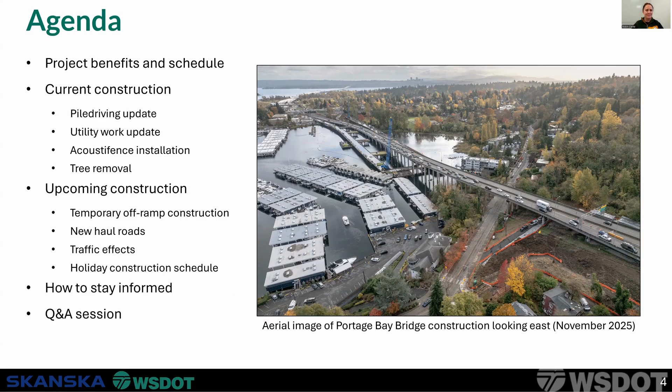All righty, thanks Alan. I can tell when someone's not really from a northern area or not used to the winter because I haven't even broken out my winter jacket yet. It's frigid, but I do hope everyone's staying warm. Thanks everyone again for joining us this month. Looking forward to giving you guys this month's updates and looking forward to the holidays and a happy new year.

So we'll start off as usual with our project benefits and a quick recap of where we're at in the overall project schedule. For folks on the line not familiar with our project, we are replacing the existing SR 520 bridge, eastbound and westbound, with two new Portage Bay bridges, also going eastbound and westbound, as well as some new bike and pedestrian connections that will connect our North Capitol Hill neighborhoods to the Roanoke neighborhoods, as well as the Montlake neighborhoods across the bay. We have the extension crossing as well over the bay through SR 520 on that south side, and we'll have the Roanoke lid on the left-hand side of that graphic, which will bring it all together with those bike and pedestrian connections.

For our schedule updates, we're towards the end of Q4 in 2025, getting towards the end of this year. Can't believe how fast it has flown, but we are in the midst of our new westbound bridge construction, still tracking along pretty well with that. We're going to get into some heavier activities next year that we'll discuss with you in upcoming meetings. We're also getting started with a lot of our Roanoke lid construction activities, which will also ramp up into next year. And we're in the middle of our in-water impact pile driving season 2, although we've taken a pause on our impact pile driving activities in particular, which Ray will talk about here in a moment.

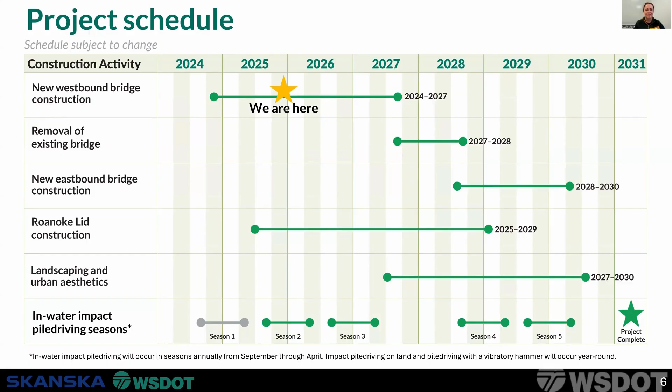And with that, I'll pass it over to Ray to kick us off with some of our current construction activities.

Thanks, Robin. I'll review the current pile driving activities. Like Robin briefly mentioned, we are currently done with pile driving for 2025, so you get a nice break for the holidays. We will resume our season 2 in-water impact pile driving, which will continue early in 2026, and that will continue till April 30th in 2026, which will complete our season 2 in-water impact pile driving.

We will have a small amount of piles over on the off-ramp towards Montlake Boulevard, which is where our temporary off-ramp will be. We'll be driving some piles as early as January 3rd. These will be 10 smaller piles, about a foot in diameter, much smaller than the piles we've been doing, and we'll be vibrating those in with impact on standby if we need to, depending on field conditions.

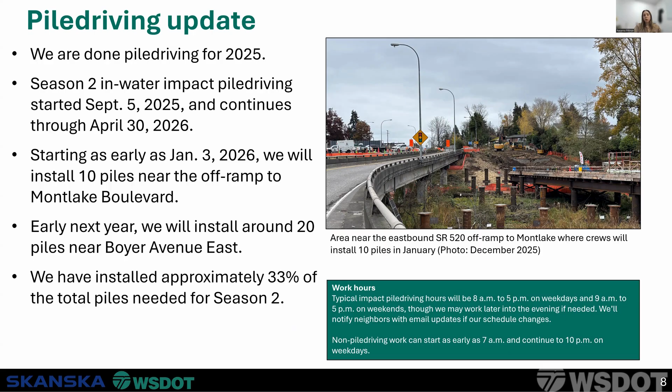Like I mentioned, early next year we'll continue our work trestle impact pile driving with about 20 piles near Boyer Avenue East, roughly between the Portage Bay condominiums and the Queen City Yacht Club, underneath the current existing Portage Bay Bridge, around that area. We have roughly installed about 33% of our total piles for season 2.

As a reminder of the different types of pile driving activities we perform, we have vibratory and impact pile driving, and we're currently in the in-water impact pile driving season.

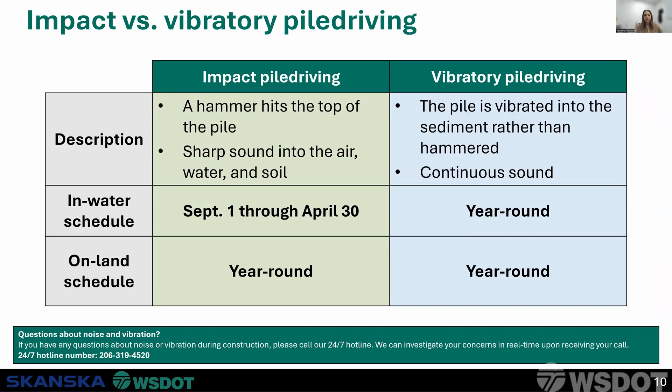And with that, I'm going to pass it back to Robin. Alright, thanks Ray. So I'll talk a little bit into some of our other ongoing construction activities here, starting off with some of our utility work.

What we've been working on recently is a King County Metro utility relocation. If folks have been driving near the East Roanoke Street area, you may have seen crews working in and around the park or the fire station there, primarily between Harvard and 10th. We've had some traffic control and operations going in during the day and sometimes during the night.

We've completed most of our work over there for the time being and for the rest of this year, but we'll have a little bit more utility work to get into next year. For the King County Metro utility installation, we've relocated some of that work underground. King County Metro is following on with their relocation efforts.

The next portion of that work is going to be other utility relocations that we've discussed at some of our past monthly construction meetings. We've also developed some folios in the past that are on our construction corner, and we'll be continuing to update those as we get into the new year through these monthly construction meetings and through those folios, so that'll get more detailed as we get into the new year.

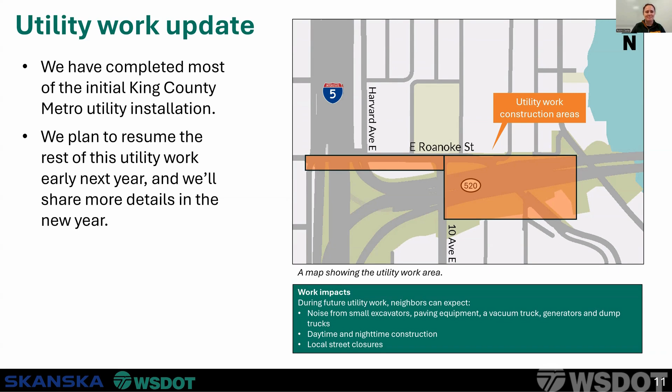Another thing I want to touch on here is our Acoustifence installation. Acoustifence, for folks who are not familiar, is a fairly tall fence installed at certain locations on the project that are particularly close to neighbors adjacent to our construction operations, where we install fence panels and then a fabric on the outside of the panels that helps reduce noise between our construction efforts and community members and neighbors that live nearby.

So what you see in the photo here is our construction progress on some of the Acoustifence that we've started over on the east side of our project at the 2575 West Montlake Place East property, right next to the off-ramp from SR 520 to Montlake Boulevard. Crews are continuing to get that installed and should have that wrapped up close to the end of this year.

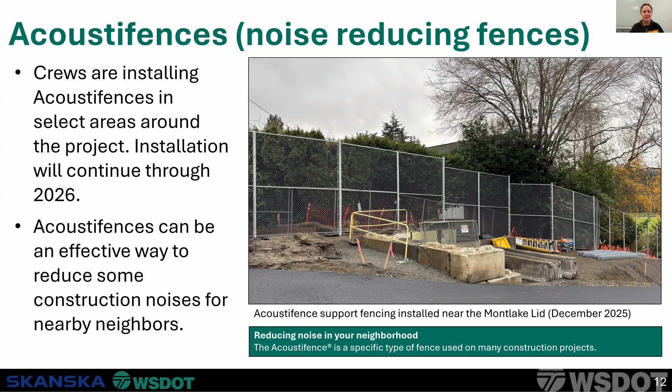We'll talk about the next location in a moment, but they'll be sequentially installing that throughout the rest of this year and into next year. Again, we're just trying to get that installed so that we can have added noise protection for folks in the community from our construction efforts, especially as activities get busier next year.

This has been a pretty big priority for us to get these two areas installed because they're pretty close to neighbors and our interface with construction activities. But on the west side of the project, we had to do some investigation for potential conflicts with the Acoustifence location and our utility work in our work zone before we installed it, so that we didn't end up installing the Acoustifence and then having to remove it to excavate for the utilities without blocking sidewalks. So there was a little bit to work through before we could get to that installation, but we anticipate getting started potentially this year, though the bulk of the work will happen within the first few weeks of the new year.

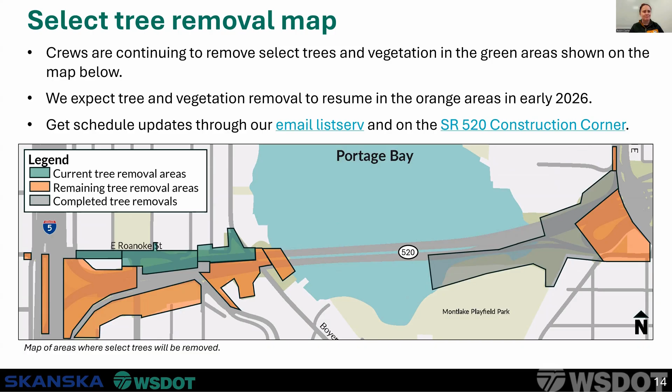All right, and with that, I will pass it back over to Ray to talk a little bit about our future construction and traffic impacts going into next year. Thanks, Robin.

As I mentioned before, with some of the piles that we've driven in the past, we are preparing to build our temporary off ramp to shift traffic from the current off ramp to Montlake Boulevard. So I'll review that upcoming. We're building a temporary off ramp from eastbound 520 to Montlake Boulevard. We've added temporary concrete barriers for the existing off ramp, and in January 2026 we'll be installing the 10 piles to support and finish up this foundation for the temporary off ramp.

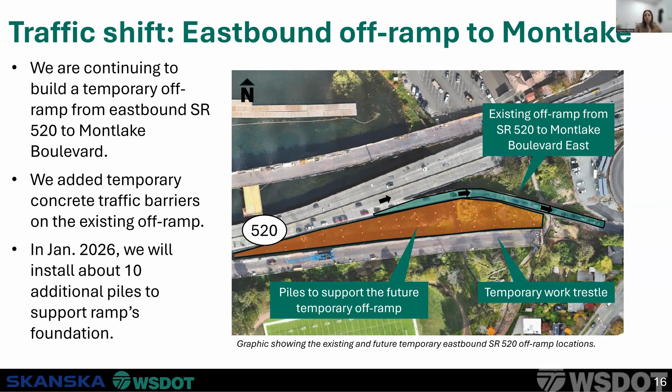So to do this, we're going to reroute traffic to the new temporary off ramp once that is complete, and this will be in early 2026. Then we'll close the existing off ramp and shift traffic.

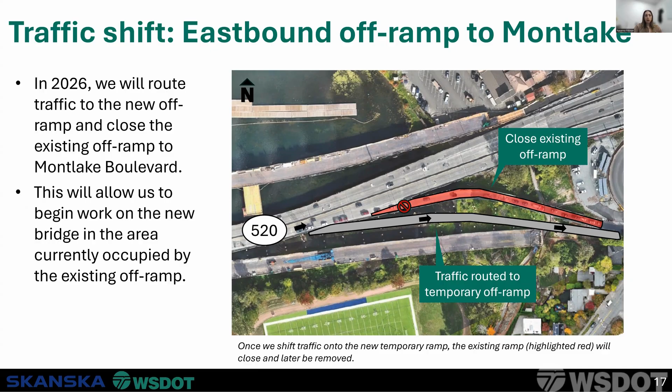I just want to bring your attention to something on the image that shows the traffic shift. You will have to make the exit a little bit earlier than we're used to in this area, so it's something to be aware of. There's a lot of crisscrossing traffic as you enter onto the current Portage Bay Bridge if you're coming from either north or southbound I-5. So just prepare mentally that you're going to have to make that change a little bit earlier than the current off ramp.

So one of the other things we've been working on is our haul road connections to our current work trestle. We're currently building the haul road that will connect East Roanoke Street to the southeast corner of the work trestle. This was included in the demoing of the property there. It's currently being graded and paved and scheduled for use early next year. We've been using the northeast corner of the work trestle, so you might see increased traffic in the area as we use the haul road.

Just note that some of that may look like a new road to access 520 for a new exit, but it is our current haul road. So we want to make sure we're using that area safely and our crews are aware of any impacts to that area.

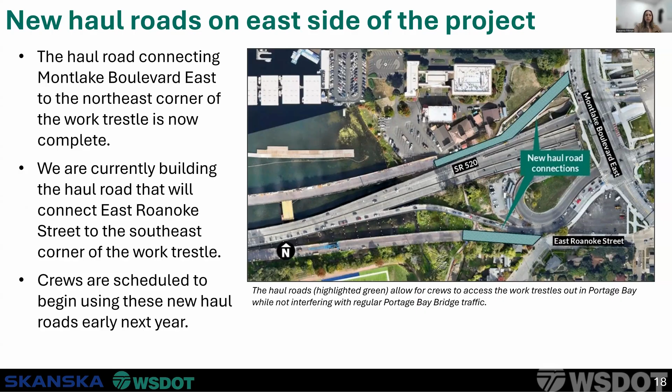The other access we have to our work trestle will be from Boyer Avenue East. We're going to install the piles for this and work on construction during season 2 in-water impact pile driving. We're going to extend the trestle before we build the new haul road. And then, as previously mentioned with the pile driving, we'll pick that up for this construction in early 2026.

One of the most important things to us at Skanska is the safety of not only our crews, but also those around us, pedestrians, and the communities we're impacting. With that northeast access to our work trestle, while we have built this new haul road, we understand it does look like access for the public. So we want to make sure these entrances are clearly marked with signs and closure cones. We do have active construction fencing around our work areas and construction-only access signs.

The orange cones will separate the entrance from the southbound Montlake Boulevard travel lanes onto the westbound on-ramp entrance, so be sure to look out for those when driving by. We're also painting traffic lines to clearly mark the haul road entrance. When we have larger vehicles and heavy trucks for more active construction, we'll have flaggers on site to direct those vehicles on and off the haul roads for the safety of the public.

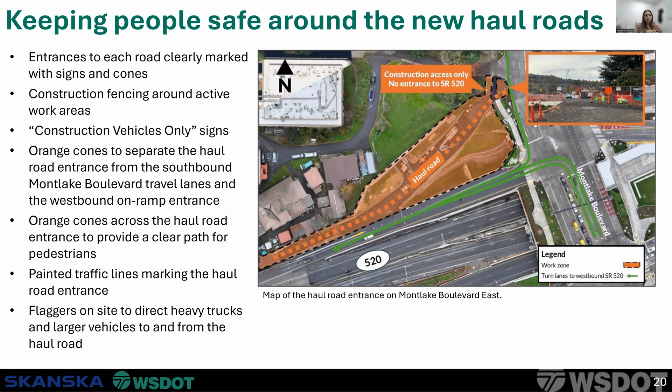A couple of traffic impacts coming early next year: on January 3rd and 4th, the off-ramp to Montlake Boulevard will be closed during the day from 7 a.m. to 10 p.m. so we can drive the piles that will help with our temporary off-ramp completion.

From January 6th to January 8th, we're going to have the 10th Avenue East overpass closed between East Roanoke and East Miller. It'll be closed nightly, reopening during the day. The closure begins at 10 p.m. and our shift ends at 6 a.m. the following morning.

From January 9th to the 12th, East Roanoke Street between Boylston and Harvard will be closed from 11 p.m. Friday to 5 a.m. on Monday. So plan accordingly for that area. It does get a little congested, but we hope to minimize the impacts as much as possible.

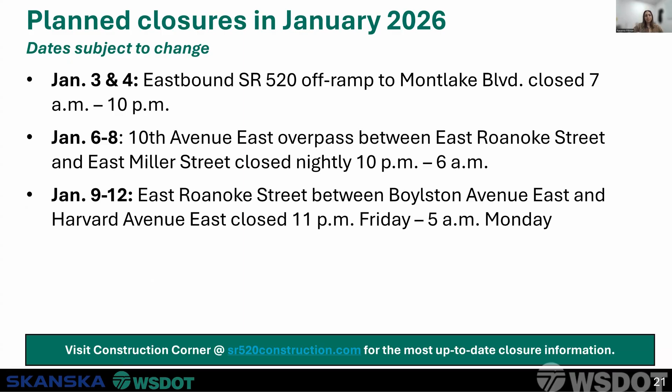Thanks, and I'll pass it back to Robin. All right, thanks, Ray.

Before I pass it on to Alan for one more pass of the hat, I'll touch on our holiday work schedule. We'll be updating our schedule for the holidays. Crews will not be working, and frankly none of our staff will be working on Christmas Day or New Year's Day. We will have people answering the hotline though, so if you run into any emergency scenarios, please reach out to us.

We'll have lighter crew scheduling around the holidays, so we don't expect any major noises or impacts, but we'll continue to keep frontline neighbors apprised if something comes up. We do still have some activities, so expect activities to continue through the holidays, just on the lighter side of what you'd normally expect for our typical week to week.

And with that, I will pass it over to Alan for wrapping us up for the remainder of the year. Great, thank you for walking us through the presentation, Robin and Ray.

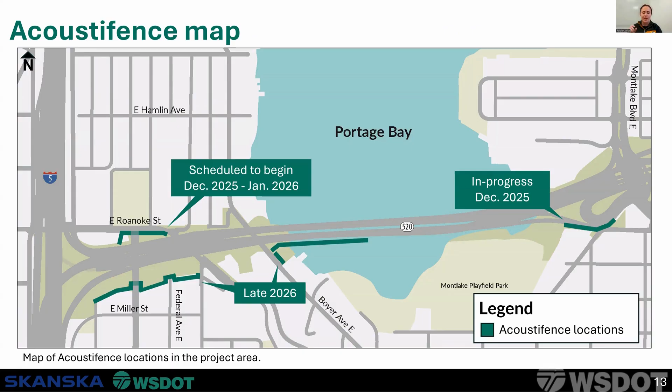Around the time we're installing some of those buffers around the limits of our project, we do have project landscaping. Dakota, maybe go to the project benefits section from the beginning of our presentation - that shows where we have some landscaping elements and sidewalk tie-ins, and a lot of work to do where our project ties into the community. The Acoustifence will be removed for us to do those installations, but we hope the tree plantings will replace the Acoustifence as the new buffer once they grow in and mature.

Thank you, Robin. The next question is regarding the haul road access on the southwest corner next to Boyer Avenue. Will trucks be accessing the haul road in this area from north of Boyer, north of 520, or south of 520?

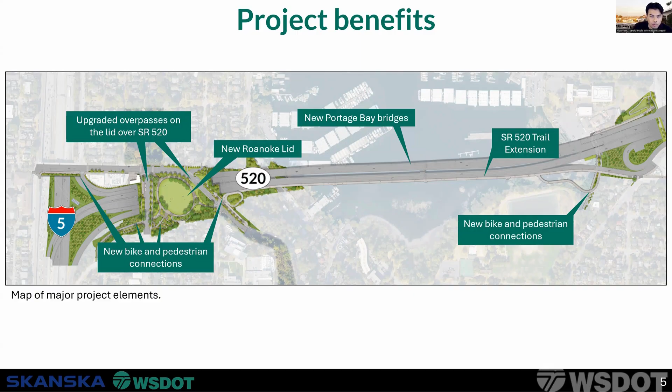That's a good question. I believe they will have the ability to access going both north and south on Boyer Avenue East - going up towards Furman and south towards Eastland Street and some of the other areas down there. We can double check on that, but I do believe they'll have both directional access coming off of Boyer Avenue East. However, we're going to be looking into some of our logistics of the haul route access and egress and how trucks are coming in and out pretty heavily as we get into next year.

We'll share the details of how we plan to bring trucks in and out of all of these access points. That's been a discussion within our team so we can share with you guys what to expect with truck access and egress, especially as folks are using those sidewalks and driving through those areas, because we want to make sure you know what to expect with our trucks coming in and out.

Thank you, Robin. The last question is regarding the pile driving and the status of the pile driving for 2025 and the resuming in early 2026. What have we completed in 2025, and what is the current pause that we have?

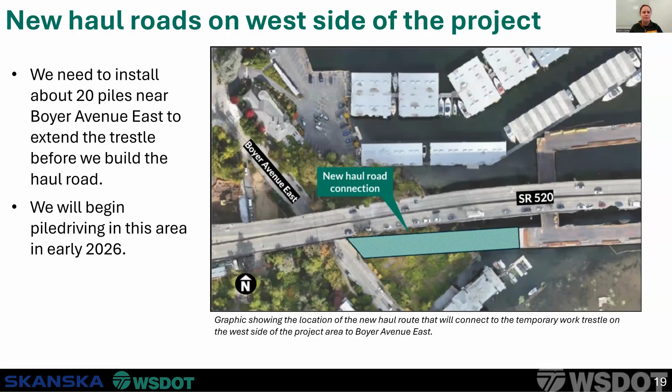I won't share any details about resident private details, but we did always plan to have a part one and part two of our pile driving this season. Part one being some of our fingers for the work trestles, and part two to come back for some of the connection elements. My understanding is that this was part of that phasing for coming back in the early new year to resume those pile driving elements.

You can see the season two remaining elements there. We've sequenced this in two different parts with some of our other construction work that's going on in these areas.

When Robin mentions the fingers, some of the piles we had installed are just north of 520 on the western side, closer to Queen City Yacht Club. That work was completed earlier this year.